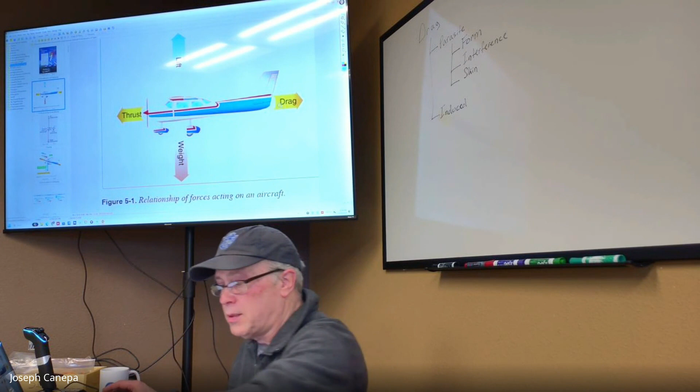All right, 4 forces of flight, what are they? Okay good, you got that. All right, let's start from the top of session 5, we'll fly through the first part of it. So obviously this is all aerodynamics we're talking about today. Again, there's our four forces: thrust and drag, lift and weight. One thing I maybe didn't mention last time is that in steady flight, these forces are balanced, so they're equal: lift equals weight, thrust equals drag. That means in any steady flight, not just flying straight and level like this, if you're in a climb, all those forces are still in balance.

So in this case, this seems kind of weird, but if you're climbing and the plane is steady, going up a flight path like this, all of those forces are equal. The only way I can think of it is you have to think a little bit about Newton.

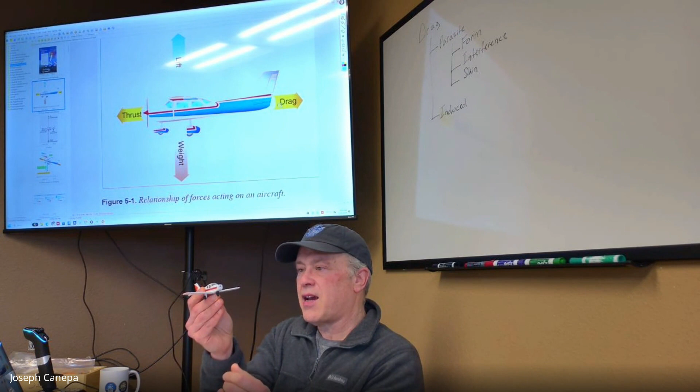He said whenever you act upon a mass, there's always going to be an equal and opposite reaction. So if this plane has zero weight and it's moving in this direction, with no forces changing that, it's just going to keep going that way. That gets back to this lift versus weight.

A lot of times people think the lift increases in a climb and it's always increasing. That's not the case. That's an important concept, and it's easy to misunderstand. So when you're in a constant climb or constant descent, or flying straight and level, both the lift and the weight, the thrust and drag, cancel each other out.

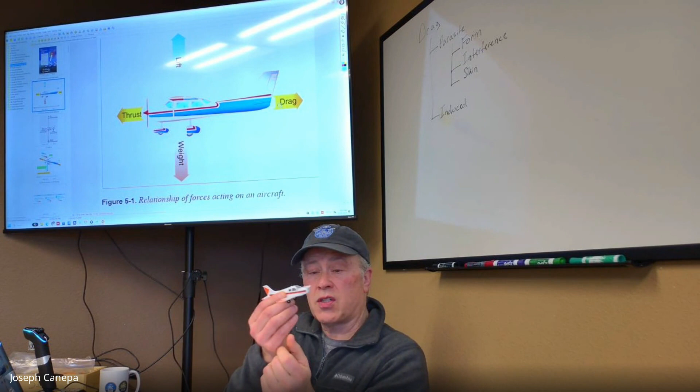So if the aircraft weighs 2,000 pounds, the lift has to be 2,000 pounds to cancel out, whether it's climbing or descending. Same with the thrust. If you've got 200 pounds of thrust moving in this direction, you have to have 200 pounds of drag in order to maintain that constant, whether climbing or descending.

If you understand that, you're going to be able to get a lot more questions correct on the FAA exam. It's one of those things that confuses a lot of students. Anyway, I thought I'd stress it a bit more. If you have questions on it, definitely talk to me, because I try to explain all this stuff as best I can, but sometimes I could probably go into a bit more detail.

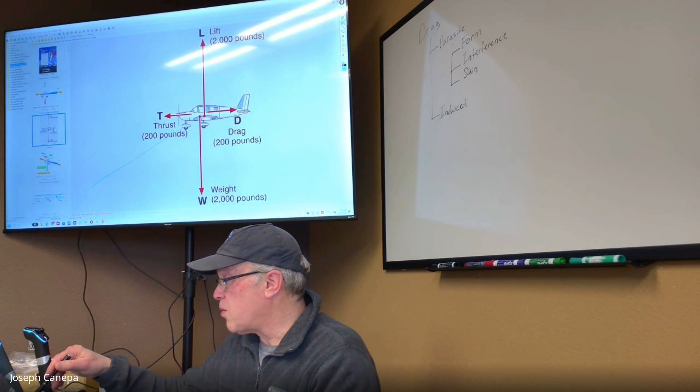So here's a good example. You've got an aircraft that could be flying in any flight path. It could be going up, or the flight path could be going down like this. Again, the lift is going to be equal to the weight, even though the aircraft is going down or up, it doesn't make a difference. That's constant flight, constant speed flight and a path there.

Yeah, and the way they worded it in the book, this is on 5-2, in steady flight the sum of these opposing forces is always zero. There can be no unbalanced forces in steady straight flight, based on Newton's third law, which again is that for every action there's an equal and opposite reaction.

And let's go to this one here. What's opposite of flight path? Relative wind is always opposite of the flight path. Important concept, you want to understand that.

So if flight path, well you guys tell me, what's the flight path of this plane right here? Down, it's going down. So the flight path is there. Where's the relative wind? It's up like this. It makes sense when you think about it. Relative wind, they're talking about the wind hitting the plane itself. So when it's flying through the air like this, the wind that's hitting it is from here.

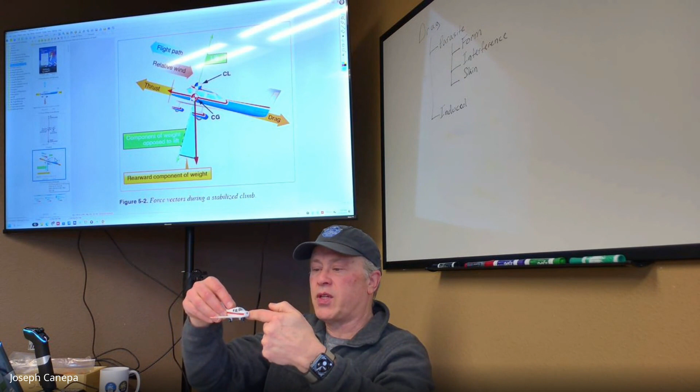It'd be the same if I was just running at, whatever, 10 miles an hour. If I'm running along, I feel a slight breeze against my face, right? That's relative wind because I'm producing forward motion. And the opposite effect is that air is hitting my face, so I have that relative wind in my face.

Same with the plane, but it's always opposite of the flight path. So flight path is this way, relative wind is that way. If the flight path is this way, again, just the opposite there. And that's important because how do we calculate the angle of attack? Does anybody know what the angle of...

Okay, so actually what you could say, that's really close. I can simplify it for you. That's correct, but instead of saying angle of the chord, just say it's the chord line versus the relative wind.

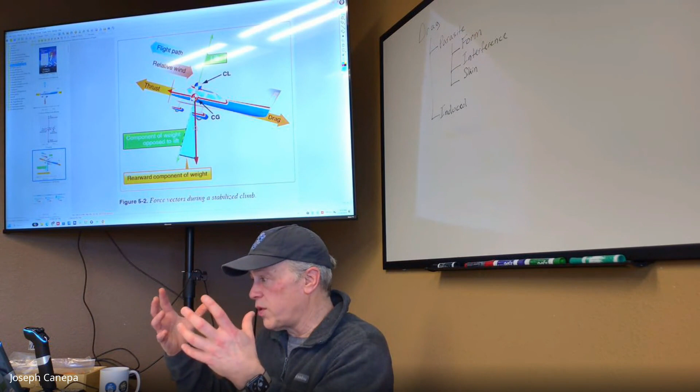So here, this right here, this lift, this is a vector - this is the total lift acting on the aircraft itself. This is the total weight. Weight is always perpendicular to the earth because that's where we get weight from gravity, right? So there's what's called a rearward component of weight. We can think of the rearward component of weight as when the plane goes into a climb, there's always that force trying to drag it down to the earth. In this case, if the plane's flying straight and level, the rearward component of weight isn't there.

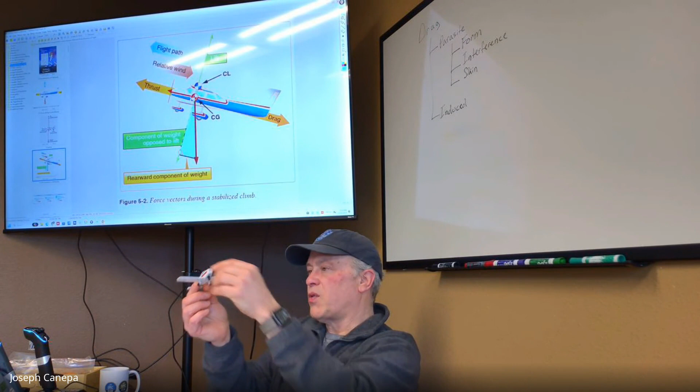If I angle it like this, going into a climb, the rearward component of weight - there's actually a little bit pointing this way. You break it up into two different components. That's what this diagram is showing you, that there are different components. You've got the total weight of the aircraft, but the load component of weight opposed to lift - that's what this is right here. And then this is the weight of the aircraft. Same with lift - they don't show it here, let's see, maybe they've got another one that shows this.

You can actually break it up into vectors up here as well. You've got your vertical component of lift, and you've got the rearward component of lift. Here - there's your vertical component of lift right there, and then you also have a rearward component of lift or drag, induced drag right there. This gets back to what we talked about a little bit last week about induced drag. Do you guys remember what that is? Induced drag is?

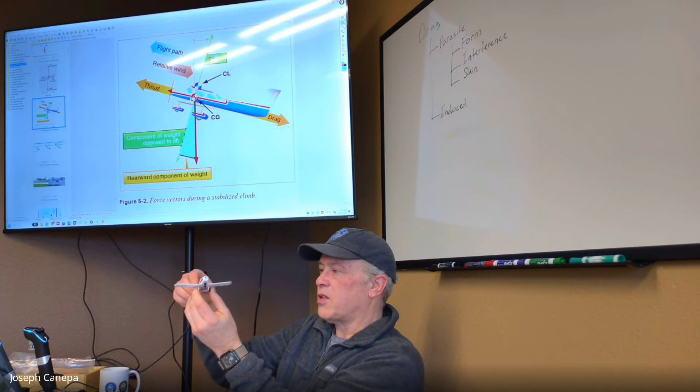Anytime an aircraft produces lift, you're going to have some drag with it. If you increase your angle of attack, you've got your lift going this way, but some of the lift is actually pointing backwards - that's your induced drag. So it makes sense the airplane is going to slow down if I fly along at a constant power setting and altitude, and start pitching my nose up to maintain altitude. There's that component of lift pointing back - that's what we call induced drag. It's induced because the pilot is controlling the aircraft; they're inducing it because they want a higher angle of attack to produce more lift. Does that kind of make sense?

So we'll get into more of this stuff here in a second too. So it's...

Okay, so you guys talked about the thrust, the lift, flight path. You've got that down. Satisfied with that. I'm going to show you this next thing.

On page 5-4, they've got a formula for lift, and it looks really complicated when you look at it. Let's just break it down. So the lift formula, let's see if I can do this here.

So lift equals coefficient of lift, times the air density, times velocity squared—that's an important point right there, we'll get into that in a second—times the shape of the wing, or the surface area of the wing, divided by 2. So that's our lift formula.

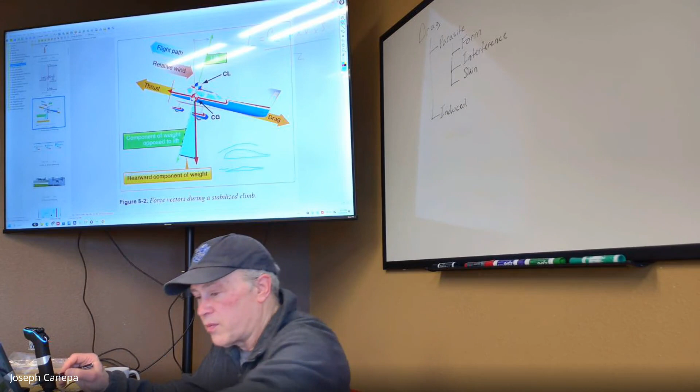So if they're both these wing cross sections—this is just a cross section of the wing itself. Again, if I were to chop this wing off right here, you'd see that cross section of the wing. That's what we're looking at. So this particular wing right here has a much higher coefficient of lift. So that's going to plug in right here. That's how that variable works.

The P right here, that is—and it's not P, it's something else. Well, no, it's a Greek character, and I don't know, I should know what that is. Your dad probably knows. But in any case, that's air density.

So what affects air density? What did we learn? Temperature. Okay, what else? Altitude. Yeah. Humidity. Yeah, okay. Temperature, humidity, right? Okay, and pressure. All those things are going to affect the density of the air. Okay, so that makes sense.

The higher the airplane goes, the less lift it's going to produce, or the colder it gets, the air is denser, right? It's going to produce more lift. I can see this every day. Every time I go up flying in the wintertime, when I take off, I use a lot less runway. I also can climb a lot faster for a number of reasons.

It's not just that the air is denser. The engine runs better because it's cooler. The air is cooler. The engine breathes just like we do with our lungs—it needs dense air to operate. So the denser the air, the more power it produces. We've all heard the term intercoolers.

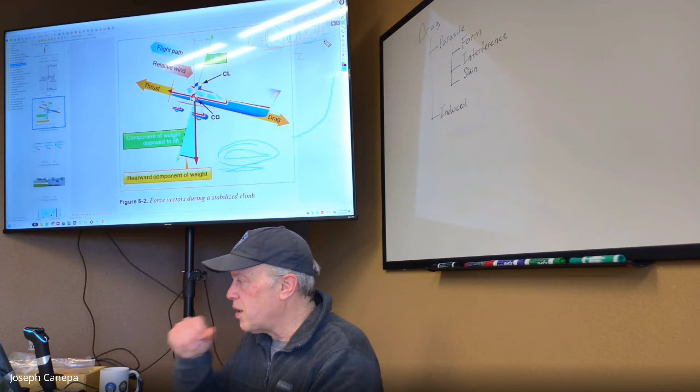The big takeaway here is that as the velocity of the aircraft increases, and we saw this when we did our flight, we can prove it right here. We saw that as we decreased our airspeed, we had to compensate with a higher angle of attack. So here we are flying along at 110 miles an hour. Now we're starting to lose airspeed, we've got to compensate for that, so we have to produce more lift. Finally we wind up with a high angle of attack because we need to keep producing that lift. That's that formula in action.

So we'll look at this again, the formula, but if that formula is describing the situation there. So one thing we don't see is the angle of attack there, just the formula itself.

All right, so we've gone through this high level speed, flight path. Again, you have that down.

Here are a couple of planes, aircraft that use lift differently. They vector thrust. So that's a Harrier jet. Has anybody ever seen one of these fly before? They're incredibly loud, aren't they? They make so much noise. But yeah, they can just hover in the air.

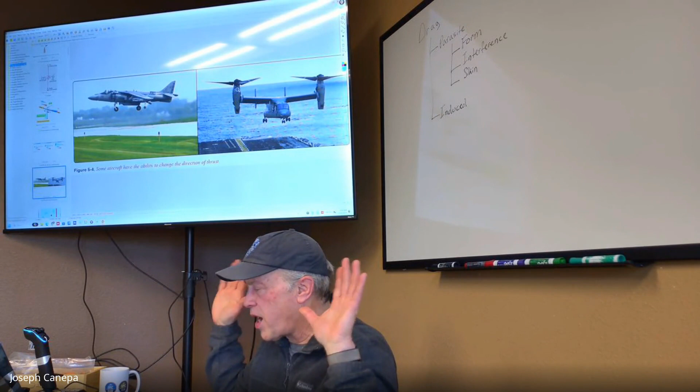And then this, I believe, is the Osprey. Yes, and those are these big engines right here - they actually rotate the propellers forward and aft, so they can adjust the plane itself. So that's thrust vectoring essentially. We don't do that obviously with general aviation aircraft.

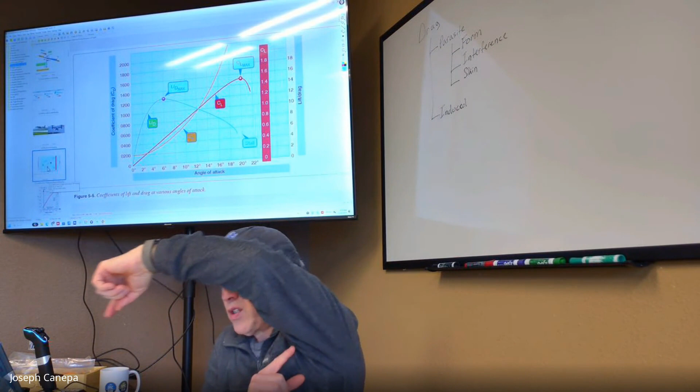So it's an incredibly efficient aircraft. You could load a lot of troops in there and get them landed in a field someplace if you needed to, and get in there fast, unlike a helicopter. Helicopters are limited by that - you've got the rotor swinging around, so they can only go so fast. Helicopters can't go much more than 250 knots, just because the rotor is going so fast when it's swinging around and traveling in this direction. The rotor swinging over here is traveling through the air much faster on this side as opposed to this one right here. It's a good concept to understand - we're going to get into that too with the props on the plane. But as it swings through there, it goes too fast, and that limits the speed of it. So the Osprey has a huge advantage over it.

All right, so let's look at some charts here. This is a coefficient of lift and drag at various angles of attack. Again, I just showed you this in the simulator itself.

So we started the plane out here at a lower angle of attack - this is the low angle of attack. And we started, the angle of attack increased to maybe like 10 or 12 degrees. Watch what happens here - the coefficient of drag, which is not the same as coefficient of lift but in a sense is proportional to it, relational to it. So you've got your coefficient of drag right here. As the angle of attack increases, your coefficient of drag increases - right there, you can see that. And it gets to a point where it just goes to infinite.

Does anybody know what that point might be? What would, as a pilot, if I reached that point in my plane, what would I expect the plane to be doing? Stalling - yeah, it would be stalling. Because the coefficient of drag is just too high, and that's because the plane is at such a high angle of attack - it's hit that critical angle of attack. It can't produce any more lift to counter that coefficient of drag, that drag. So it's going to start to settle.

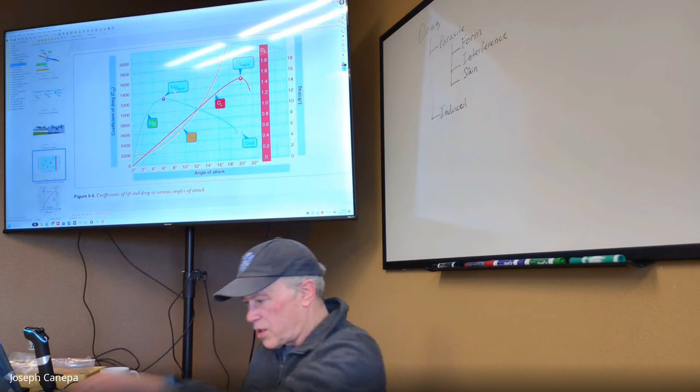There's other charts you're going to see, I'm going to throw a ton at you. This one can be a little confusing, but think of the primary elements here as lift and drag. Just what is the lift of the aircraft, what's the drag, and keep in mind that drag refers to all the different components producing drag on the aircraft. It's that induced drag that the pilot is inducing on the aircraft. As they increase their angle of attack, they're increasing their induced drag, and that's what we're seeing here.

They talk about 16 degrees. After that, the wings stall, and the plane is not able to maintain the altitude you're at. The important thing to understand about stalls is they aren't violent maneuvers in most general aviation airplanes. You'll feel kind of a buffeting, and the nose will kind of fall down like this.

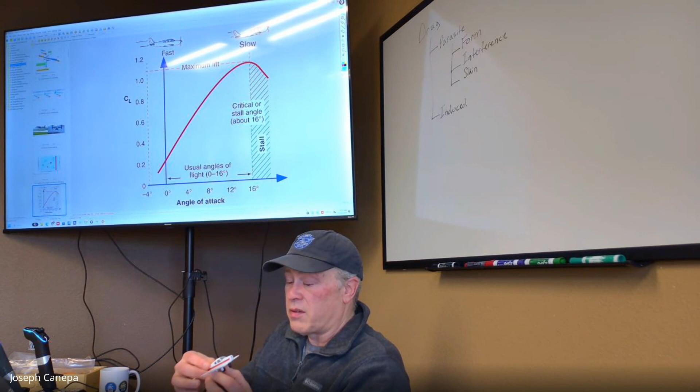You'll start losing altitude. I've done this before at 5,000 feet - my instructor forced me to do this. We took the plane up to 5,000 feet, and he basically locked the control yoke and said, you need to control the aircraft with just the rudders. Essentially what we did was we stalled the plane, it was a little Cessna 152. We stalled it, and the plane just floated down like a leaf, the whole way down. It was a really weird sensation. I'll do it with you guys if you want to try it sometime, it's a lot of fun. But I'll never forget that experience. It helped clarify, for me anyway, what's happening in a stall.

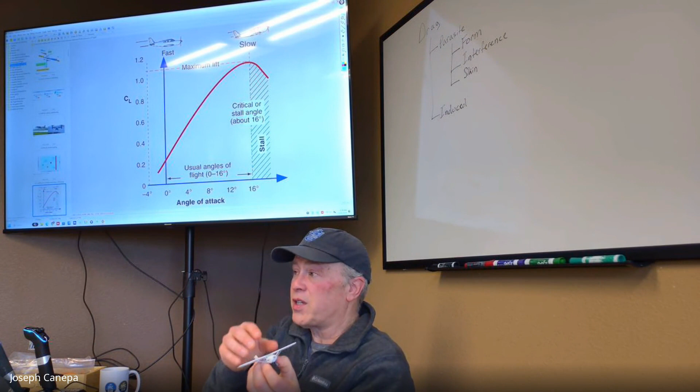Because you can still, to a certain degree, control it. When you stall an airplane, it's not like the whole wing stalls. If the whole wing stalled, the plane would just literally fall, right? If you had no airflow over the wings, the plane is just not going to support itself, so it's going to fall. That's not what happens in a stall. In most cases, it's just going to start floating down like this. In some cases, the nose is going to pitch down. Most of the time, if you just let the airplane do what it wants to do, the nose is going to want to pitch down and recover from the stall on its own.

Right, coefficient of lift, yeah. So you can only produce so much lift with any airfoil.

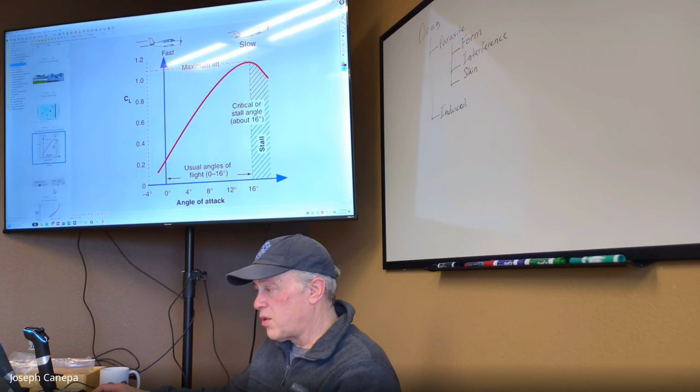Let's go here, okay, let's talk a little bit about drag. This is on page 5-6. There are, up here I've got a couple of them. There's two main types of drag: parasitic drag and induced drag.

So parasitic drag has to do with everything on the plane that's really not related to producing lift. So when you look at this plane, is there something on it that just doesn't look like it would produce lift? The gear, yeah, definitely, that's going to produce parasitic drag, you've got all that stuff hanging out. What about if we get really close to the plane, is there other things we can see?

How about antennas? Antennas produce drag. Rivet lines produce drag. It's probably going to produce a certain amount of drag, especially if you bring the throttle way back, it's going to produce a lot of induced drag at that point, right? All right, and then what else?

Yeah, lights that stick out, you'll see it a lot on older aircraft. The lights weren't built into the wings. The newer aircraft, they're all built into the wings, so they cut down on the drag. But a lot of the older aircraft had these huge things that came out. I think it was the DC-3 that had a huge spotlight that swung out from underneath the wing itself, and that produced a lot of drag.

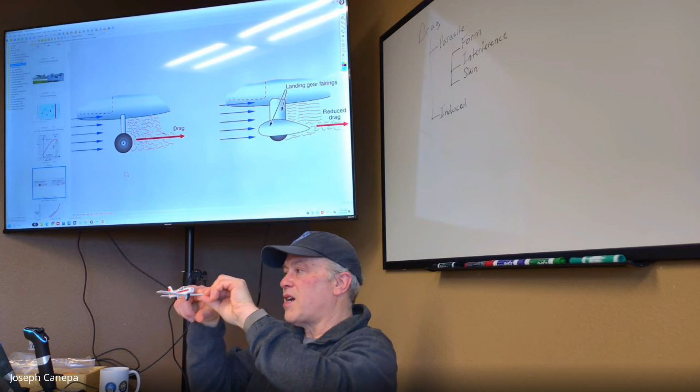The fuselage itself, believe it or not, is designed to produce lift. And it actually does. If you look at the shape of it, it kind of looks like our Bernoulli camber. It's got a kind of camber. There's the fuselage right there. See how it slopes back like that? It's actually designed to produce a little bit of lift. You get a flat body right here. The air travels faster over the top, so it's going to have a little more downwash here. It's going to produce a little more lift there. So that's part of the production of lift.

Whereas the landing gear is just pure drag. In this case, we call it parasitic drag. So rivet lines, bugs, and things like that, that's going to produce a certain amount of parasitic drag. Believe it or not, people laugh at me about saying this, but when I wax my plane, I do feel a difference in the performance of it. I get higher speed, especially after it's been through a summer, a lot of flying in the bugs and stuff like that, and it's coating everything. Cleaning it up really does help a lot.

So, all right, let's see. Let's go here. So that's parasitic drag there, and again, that's just one of many.

So the thing about parasitic drag is it's not too noticeable at slow speeds. If you're flying along like this right here at, let's say, 60 knots, and the plane's top speed is 120 knots, parasitic drag isn't that big of a factor. The rivets and stuff like that, they're not going to produce that much drag. But the faster the plane goes, the more those things are going to affect that parasitic drag. It's going to increase the drag on the aircraft, okay, the parasitic drag.

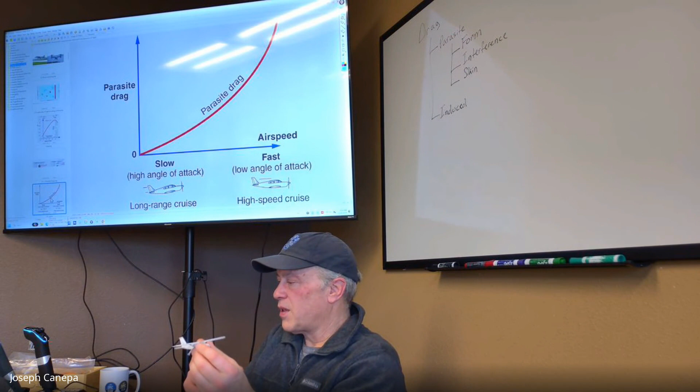And again, so parasitic drag goes up as the aircraft goes faster, and so much so that at some point the plane just can't go any faster with the induced drag and the parasitic drag. Well, actually, with parasitic drag, the plane just can't overcome the parasitic drag. The induced drag actually at higher airspeeds drops down to almost zero, almost nothing, because of the way -- let's go back here.

So here we're going fast. This is where we have a low induced drag right here. And if I go slower now, at some point here, the pilot's going to start pitching up. There we go. Okay, you can see the wing there increasing, the angle of attack increasing. Now we've got a high induced drag there. Now there's a lot more wind, the relative wind, hitting the underside of the wings there. It's hitting the bottom of the elevator here, the horizontal stabilizer, also the bottom of the aircraft.

Getting hit, and you're getting lots of induced drag, as opposed to flying much faster back here. Our induced drag is almost nothing. That's because Bernoulli is doing most of the lift there, right? Okay.

So again, Bernoulli right here is producing the lift. This aircraft weighs 2,000 pounds. Bernoulli is doing a lot of the lifting there. At this point, Newton is producing a lot of the lift. But because of that, all that air hitting and striking it and producing downwash, it's producing a higher induced drag. Right? Does that make sense?

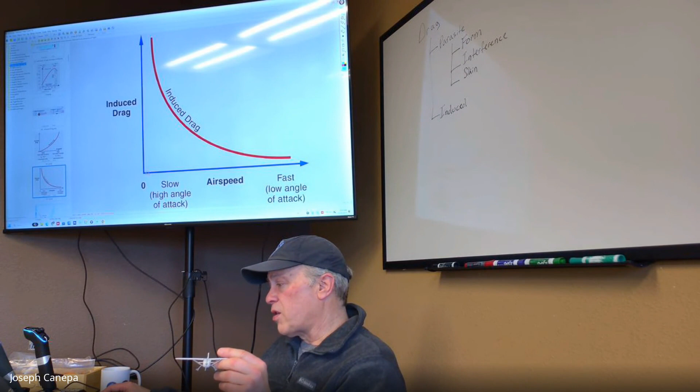All right, let's go here. There's induced drag. So this is the classic chart, a graph for induced drag. Down here we've got the airspeed on this axis right here, and induced drag on this axis. The slower the aircraft goes -- so like it's just sitting there on the ground, obviously there's no induced drag. When the aircraft starts flying, we get to about 60, 70 miles an hour, we're going to rotate. There's a high induced drag. We've got to increase that angle of attack to rotate and actually climb up away from the airport, right? So there's a high induced drag at that point.

And then as we climb up and get to our cruise altitude, that induced drag is going to start to go down lower and lower, and eventually the faster we go, the lower that induced drag is going to be. So we've got very fast, low angle of attack, just like we said in the sim. We're able to see that.

These concepts are important to understand to answer those questions. You can memorize this stuff, but I guarantee it's going to be a lot easier if you understand it. So if you have questions, please talk to me about it. I try to do my best to explain this stuff, but sometimes I don't always get it across to everybody. So if there's something you don't quite understand, let me know.

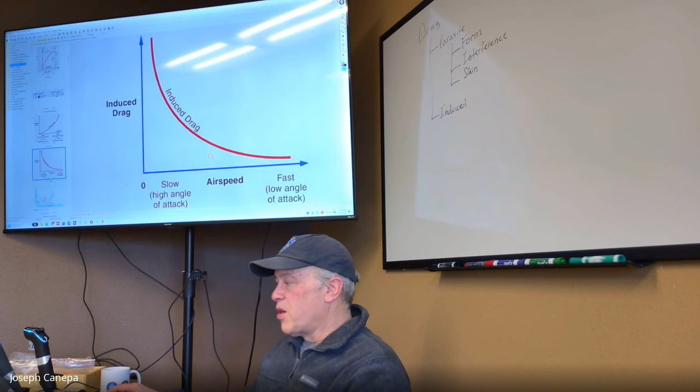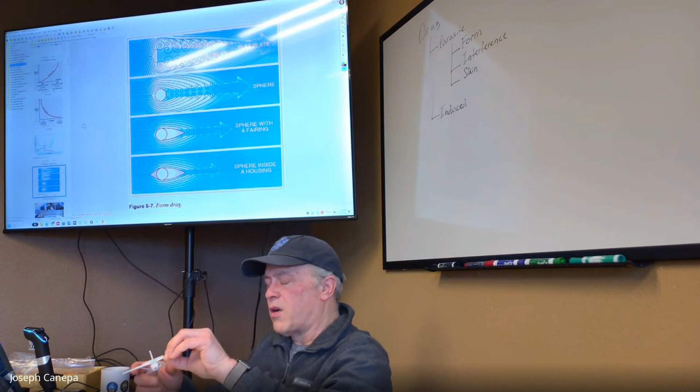A fairing is often used on tricycle gear aircraft, any aircraft that has fixed gear where the gear doesn't retract or anything like that. What they'll do is put covers over the wheels, the top part of the wheel, so that when the aircraft is flying through the air, instead of the air seeing just a round shape, it actually sees a more streamlined shape.

I think we've got one here—let's see if they've got... yeah, here, let's use this right here. So these are fairings right here, these little boots around the wheels. The wheel sticks out the bottom. What that does is cut down on the drag, the parasitic drag. It makes it easier for the aircraft to fly through the air.

They're just showing the relationship between, for instance, a flat plate. Those eddies I was talking about are produced on the wings as well when we stall. This is what's happening to the airflow—it's hitting that ball, comes around, sticks on the surface of the front of it, but then as soon as it hits the back, it starts producing these little swirls, and that's essentially creating drag.

So if this is our tire and we put it in a fairing like this, it cuts the drag down a little bit more, and this is even better because we're guiding that air around the tire so it's not producing those eddies. There's a small amount of turbulence there, but not much. It's definitely better than something like this.

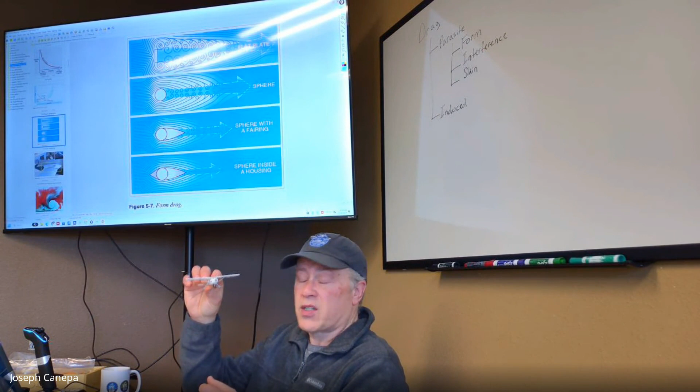That's producing lots of drag, contributing to our overall parasitic drag of the aircraft the faster we go. It makes sense when you think about it. If this fluid is moving faster, it's going to be more turbulent. If this air or liquid hits something, it goes around and maybe swirls a couple times, then smooths out again. But if you make it go faster, it keeps extending that turbulent area, and eventually that whole turbulent area creates lots of drag. So the faster we go, the more drag it's going to produce.

In this case, we're adjusting that here, putting a fairing around whatever it is. You'll see a lot of antennas with fairings on them. Oftentimes they just look like a shark fin. If you walk up to a plane and look at the outside, you'll see these little vertical pieces of plastic sticking up, or sometimes on the bottom. They're designed to cut down on parasitic drag.

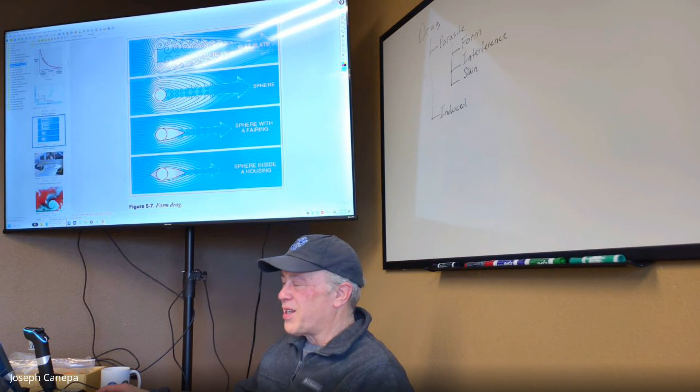Some of the older aircraft you still see flying out there didn't really care about drag that much. They were happy if they got over 100 miles an hour. So you don't see a lot of those fairings and things that reduce parasitic drag on them.

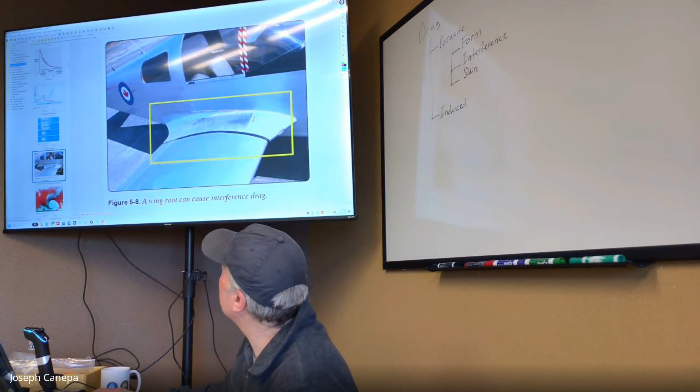You can actually see over here, there's an antenna right there that's kind of got a shape to it, coming down a little bit. This antenna back here is just a circular antenna with no drag reducing capabilities at all. This one at least has got it angled back a little bit, with kind of a shape, a fin coming off of it there. So that's helping to reduce the parasitic drag.

So again, form drag has to do with the shape of the aircraft, the airfoil, and various intersections of the wing, the connection between the landing gear and the wing or the fuselage. That's going to produce form drag. So that's what form drag is.

There's also skin friction drag, which we've talked about. That's going to be your rivet lines, and if you've got an old airplane, sometimes the paint has this flaky look to it, almost like a powder. That produces a tremendous amount of parasitic drag at high speeds. At low speeds it's not going to do that much, but at high speed it definitely slows the aircraft down.

And then there's interference drag, let's see, we talked about that.

Oh yeah, actually I got that mixed up. Interference drag is going to be the intersections between the wing and the fuselage, and various areas like the gear attaching. That is interference drag.

Form drag is essentially any shape on the aircraft that is not going to produce sufficient lift or any lift at all. So it could be just the underbelly of the aircraft, the shape of it, that's going to produce a certain amount of drag.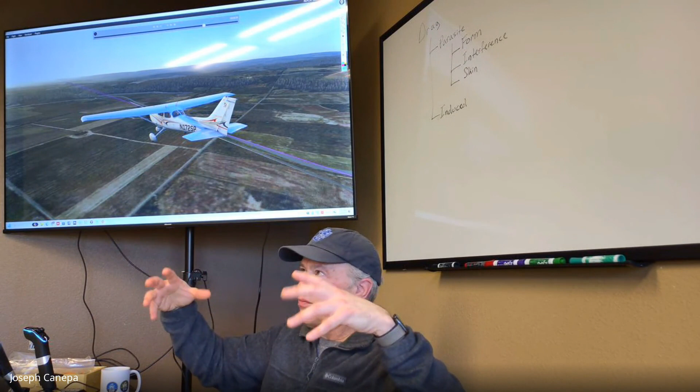High speed—has anybody ever seen the movie Die Hard? It was Bruce Willis, an old movie, came out in the 90s I think. There's a scene at the very end where Bruce Willis is running down the runway, and there's a huge jet landing right behind him. They filmed this live, with a real jet landing right beside him, a film crew out there, smoke blowing across the runway at night—really brilliant scene. As he's running, the plane passes over the top of him.

And you see this circular form—do you remember seeing the circular form of the gas there? That's a wingtip vortice, and you actually saw it in the movie. If you ever watch it again, at the very end, look for Bruce Willis running along the runway, and you'll see the swirl of smoke, and then you'll see him fall. I thought that was a really good illustration of how powerful wingtip vortices are. So this is something we talk about—what a wingtip vortice is.

Let's get back to Bernoulli and talk a bit about that. As this plane is flying along, you've got low pressure on the top of the wing and high pressure on the bottom. As air flows across, it gets to the end and wants to go to where the low pressure is. The air on the bottom tries to escape, slowly flowing outward. It hits the wingtip and immediately wants to go to the top, producing these spirals. If I draw it in another dimension, the spirals would look like this.

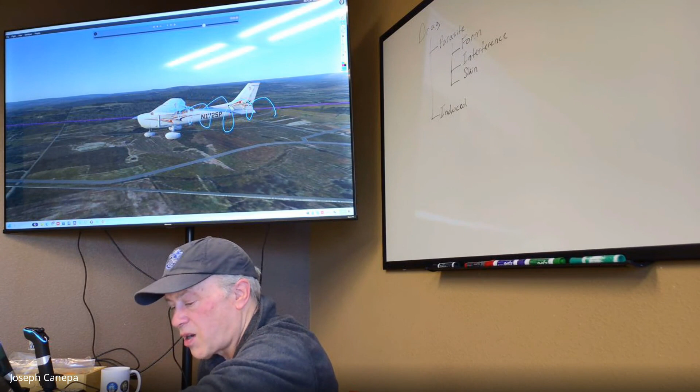So that's why it's important for you to know what a wingtip vortice is. It also plays a part in landing, which we'll talk a little more about. Wingtip vortices are strongest when the aircraft is flying its slowest and it's heavy.

They talk about the wingtip vortices here, and this is essentially what you're going to see if you were to actually see it. That's why I love that movie so much, because at the end you actually see not just the wingtip vortices from the smoke, but how powerful those vortices are to just blow him over. The actor didn't even know this was going to happen, and when it hit him, he wasn't acting. It just knocked him over as he's running down the runway, very similar to the illustration in 5-7.

You'll actually see these vortices with these swirls, and then it eventually hits him and he wipes out. It's at the very end of the movie if you want to take a look. I thought it was just a good way to illustrate that.

So let's take another look at it. If we look at the vortices again, the air goes from the high pressure air on the bottom of the wing, hits the end of the wing, springs out, and pops over the top, creating these swirls.

This is a small aircraft. If this was a 747, the vortices would be much stronger because they're displacing a lot more air, and it comes off of both wings. You have to think about it this way: high pressure to low pressure, the air tries to flow up to the low pressure. Because there's low pressure on the inside, it produces the swirls on the inside.

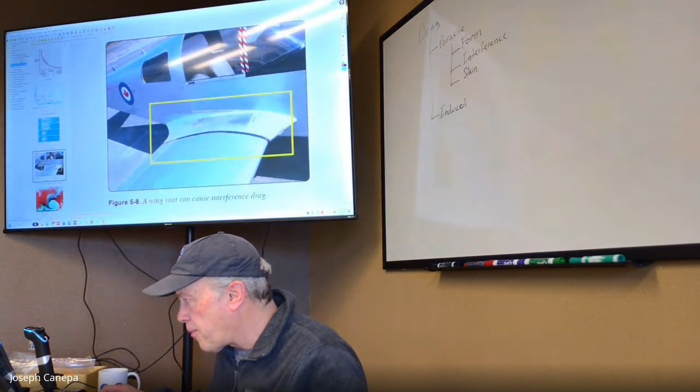So the normal path for that big jet - they sink at about 500 to 1,000 feet per minute. We want to be away from that vortex because it's still strong even after a couple miles. If you're right behind the aircraft, it could break up the plane itself, or at least roll the aircraft if you're flying close enough. Depending on it, if you're flying a really small plane, it's going to have more of an impact than it would on a larger one. But we want to stay away from those things as best we can.

Yeah, absolutely. They'll give you a wake turbulence avoidance alert, or a caution - they'll just say 'caution wake turbulence' or something like that. But it's typically around the larger airports where they're flying larger aircraft. If you had two small planes flying behind one another, since they're not displacing as much weight, the wake turbulence isn't going to be as intense, so it's not as critical there.

Still, you want to watch out for it, because what produces those vortices is that high angle of attack. A heavy aircraft is going to displace more air, right? And it's going to produce higher, more intense vortices - a greater wake, just like a large boat. If I was in a canoe behind a cruise ship, it would be a rough ride behind it. Same thing with a plane - you're traveling through that fluid, and you want to avoid areas that could cause problems.

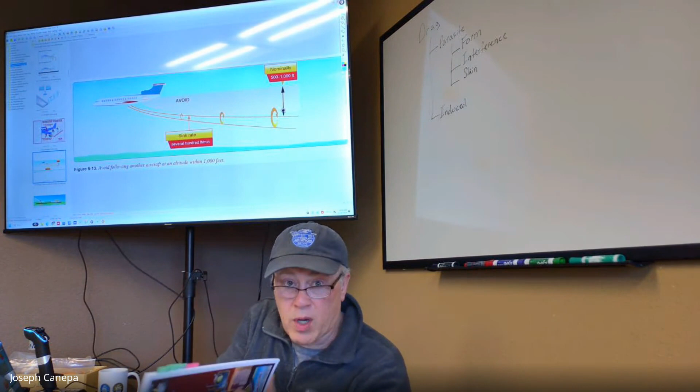Take a hovering helicopter - you don't think about that, but you've got all this downwash, kind of a conical circle around that aircraft producing these vortices all the way around it. That can cause problems, especially on landing. We have a lot of Blackhawks that fly up from Madison and land at Baraboo, and you want to be careful when you land behind one of those. If they're practicing and coming in to land, you always want to be sure you don't run into their rotor wash - it's very, very bad.

One benefit for pilots regarding wingtip vortices is that as a large jet or aircraft comes in to land, the minute they touch down on the ground, those wingtip vortices pretty much stop. So if you're going to land behind a large jet, you want to land after the point where they touch down. If they touch down at, say, the first quarter of the runway, you want to land after that point, because then you won't have the wingtip vortices - they're just not producing anything anymore.

What's producing lift at that point? What produces lift when an aircraft is on the ground? The ground, exactly. So it's not producing any lift, and that's what's causing the wingtip vortices - the lift of the wings. Because the aircraft is on the ground, there's no lift being produced by the wings, and that's what's producing the wingtip vortices.

Okay, right, so let's talk about - let's take a look here. We've got to talk about stability, most of that's done here, this one. And they go into wing shapes here, we'll touch on that a little bit, but forces and terms, we do have to talk about that. So okay, let's talk about ground effect - that's on page 5-11.

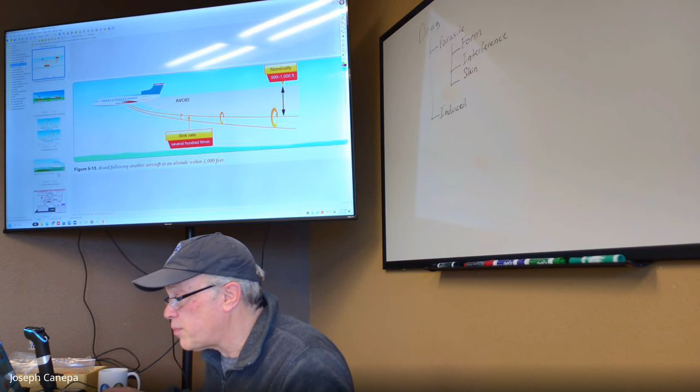What's causing it is the ground is resisting the air that's the downwash from the aircraft as it gets closer to the ground. Let's see if I can draw this here. There we go, this is a good illustration of it.

Up in the air, the plane is flying along, maybe well over a wing's span above the ground. You can see the flow of air around the aircraft flows down nice and smooth like this - that's the downwash. There's a lot of Newton's work in here, where it's deflecting that air down, pushing it down. Think of this part almost like a spring.

When the aircraft gets close to the ground, we get into what's called ground effect, considered usually about the span of the wing itself, close to the ground. So if my hand was the runway, and this plane right here has the wings there, if it's within that distance, this plane would be feeling ground effect - it would be producing a little bit more lift.

What's happening is you've got this downwash, and there's actually less drag occurring here. You don't have as much drag because as the air hits the ground, think of it like a spring. When this spring touches the ground back here, it kind of keeps the aircraft up in the air, so it's going to float.

This gets pilots all the time, including myself. You come in a little fast, and what happens is you stay in that ground effect, and the plane just wants to stay up there about 3, 4, or 5 feet above the ground, and it'll stay there forever until you lose the airspeed - you bleed it off slowly.

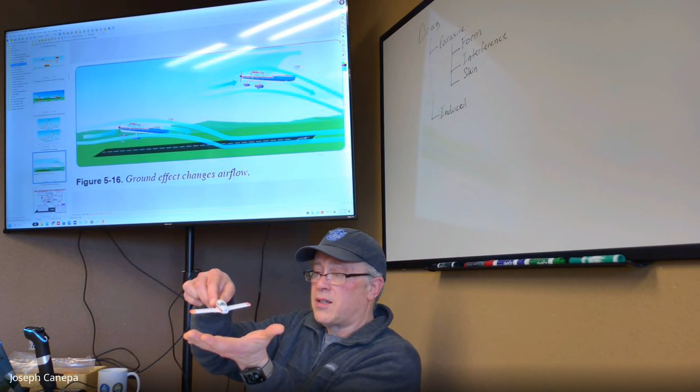What you want to do when coming in for landing: come in like this, say here's a runway, bleed off your speed and basically get to a point where you're really close to stall, if not stalling the plane right onto the runway. Because then the wings are not supporting the aircraft, the wheels are, and the plane stays on the runway.

I've had it happen to me once before, I got into a porpoising situation. I was able to work out of it. It was pretty scary. I've seen a lot of people go through it, and some of them the porpoising moment gets so intense that it actually hits the nose and destroys the prop.

So if you get into one of those, the best thing to do is just go around, give it full power, take off. Don't even mess around with it - that's what I tell all my students now. That happened years ago when I was a student, I got into that situation, but I learned a lot from it. Again, if you get into one porpoising moment, the best thing to do is go around, come back, and stabilize your approach, making sure you're coming in at the right speed.

Ground effect is something we have to be aware of because it affects how the plane flies close to the ground. It's not going to just come in and we're not going to be able to just land like this.

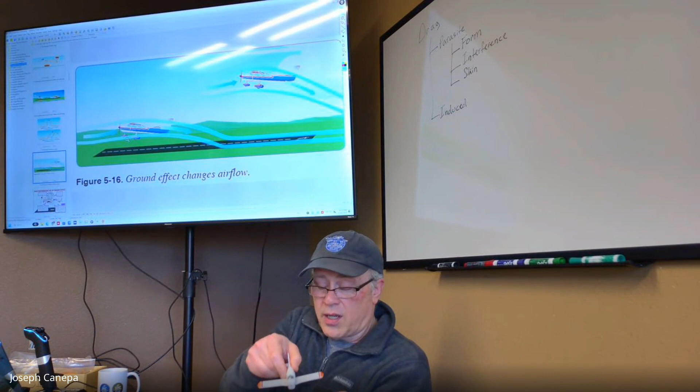Usually you hit that ground effect. What you want to do is fly in and then hold that nose off the ground. You may have to keep applying back pressure to keep the nose wheel off, so you land on your mains, then let it slowly settle out on the ground.

That ground effect happens because the downwash of the plane is hitting the pavement. It's reducing the drag on the aircraft, so it essentially produces more lift.

If we have a 2,000-pound plane, we really want the lift to be much less than 2,000 pounds, right? We want the plane to come down, so we have to reduce the lift of the aircraft. So we have 2,000 pounds of lift, maybe we want like 1,800 pounds. We don't know what that number is exactly. In the cockpit, all we're doing is adjusting the throttle and the control yoke.

You want to make sure that when you come in, you're aware of that ground effect, and you'll experience it the first time you fly. You'll see it several times after that too. That's just the way aircraft operate with ground effect.

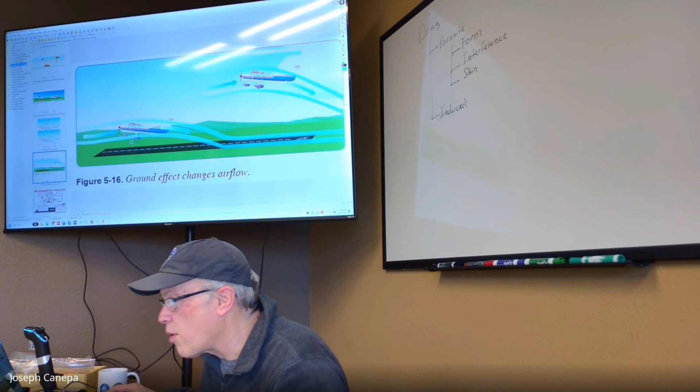The other thing to consider is you've got this downwash, and you also have those wingtip vortices, remember we were just talking about those. Let me see if I can do a diagram like this. Remember we were talking about the wingtip vortices where they came and swirled back like that.

We've got a high angle of attack right here. This is our chord line of the aircraft, and here's our flight path. I've got a relatively high angle of attack, and it's producing those vortices. The thing about wingtip vortices is they start to dampen the closer you get to the ground. As they come back here, you can see they're not as intense as they are up in the air at the same angle of attack. This one is flying the same flight path, same angle of attack, but it's producing much larger vortices up here as opposed to down here.

Wingtip vortices are drag, right? So because of the reduced strength of those vortices as you get close to the ground, you're going to have less drag back there as well. It's kind of a combination of things causing this ground effect. The thing you have to be aware of is that the plane is going to operate a little differently in ground effect than it would in regular flight.

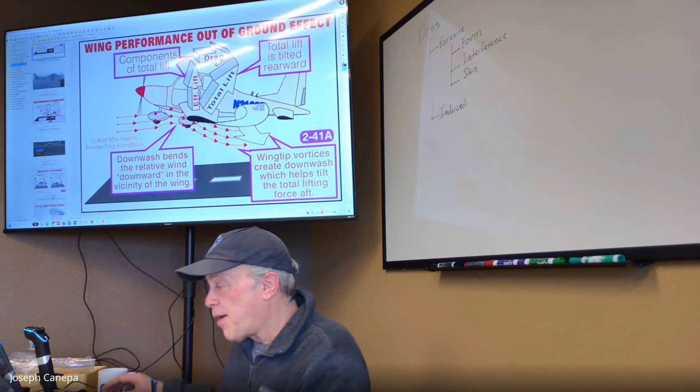Let me just introduce one last concept, and then I'm going to turn it over to Wes here. Let's go to our plane and talk about some of the forces in the turn. Let's do this. Actually, let's just do this. All right, so first thing I'm going to do is switch over to our...

Switch this right here. All right, so what I'm going to do is watch the outside of the plane. See if I can adjust our height. It's roughly what our head would be looking at right there.

All right, so I have to first off, yeah. You guys hear that? What was that? Stall warning. Yeah, okay, last demonstration here.

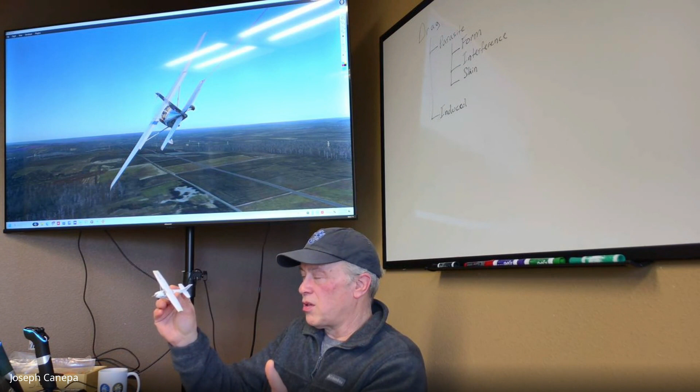What's happening there is you're feeling centrifugal forces, or G forces, in the turns. So what I always have my students do to illustrate it is we go into a steep turn. I'll do the turn, all you have to do is raise your arms. And if your arms weigh 8, 9, 10 pounds, in a steep turn they're going to feel like twice that weight. You can feel it, when you lift up your arm it feels really heavy.

And you start getting you sink in the seat, you feel heavier, because essentially that's that load factor and the G force that's forcing into your seat. What's happening there is we've got all these forces here.

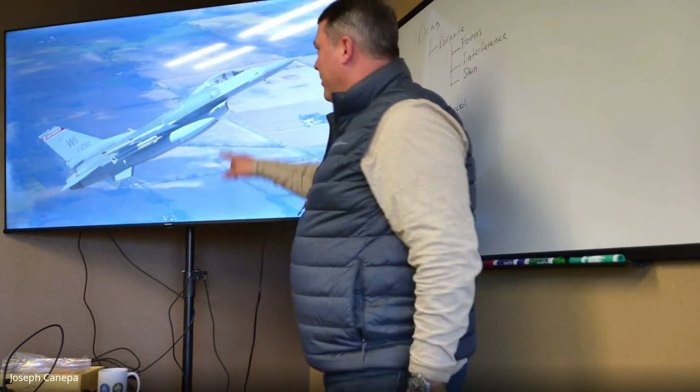Because it's trying to give as much as it can, and even then, we probably still have 100 knots overtake on the 172, trying to fly as slow as we can with this thing. So probably going by at about 250 knots. Okay, that's about as slow as this thing will fly through the air at that speed with that configuration.

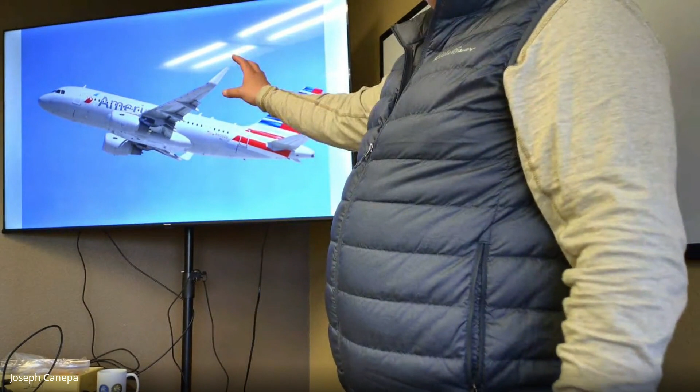All right, that's what I fly now. Airbus 319 to 321. It's a little bit different. I just thought of it at the end. I was going to grab some pictures of the cockpits that were a little different, just to show you, a lot more room for activities in here. Okay, get up, move about, grab a sandwich, go to the bathroom. So, for all that. Okay, passenger aviation.

So it's fine no matter what you want to do in aviation. Okay, there's really three groups I've kind of put things into. Your enthusiast, okay, your people that want to do things for hire, so your commercial aviation, and then people that want to serve their country and be in the military. Okay, so enthusiasts, right? Like, who are those people?

People who like go to air shows, that just enjoy flying. So person who owns a 172, people who have aircraft down in the hangar here, right? Who just, yeah, like a local flight instructor doing those kind of things, just to enjoy aviation in general. And there's absolutely nothing wrong with that, right? Just fun, you just enjoy it and hang out and do that. And it's still, you got to be competent, right? So you got to be a competent pilot to do that.

Okay, then we have commercial aviation, right? So how do we do that? How do we get into commercial aviation? Kind of all starts here, but we have aviation colleges, and some of you guys are probably seniors, juniors in high school, right? Okay, so maybe you're looking to go to a place like University of North Dakota, Dubuque, Embry-Riddle, those kind of places where you just focus mainly on aviation or any kind of subjects. Instead of majoring in something like business, you'd major in like airfield management or something of that sort.

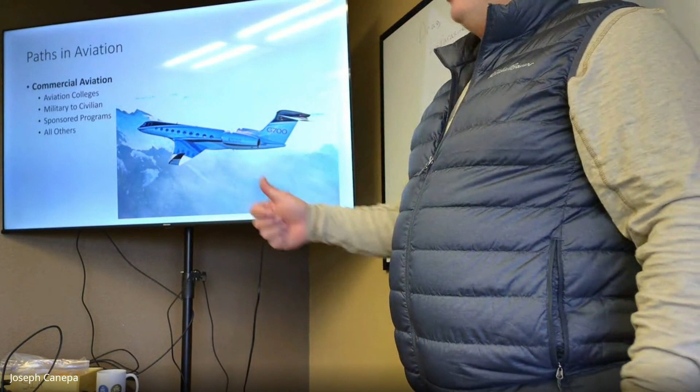And then there's sponsored programs. We have American, we have a cadet program. United has something called the Aviate Academy. So what do? Okay, this is for people who maybe don't have the money and the funding, but have a really strong interest that can apply. And then, for instance, United's going to pay for a lot of that stuff in your school. And then at the end, you're going to owe them a little bit of a debt. It's a debt you want to pay anyway, right? Because you want to go fly for them.

So, for instance, I have a friend from the Dells, a kid, who I've been talking to all through his high school career. And then when he went to college, he went to University of Dubuque. I think there's an aviation school down there, right? I forget the exact name of it. All right, bottom line though is halfway through, Envoy, who's one of American Airlines' regional airlines, they fly the Embraer 175.

They paid for half of his college education as long as he gave them, I think, 3 years at least. Okay, he had to earn that, right? He had to get certain grades. He had to do certain things. He had to be good at what he did.

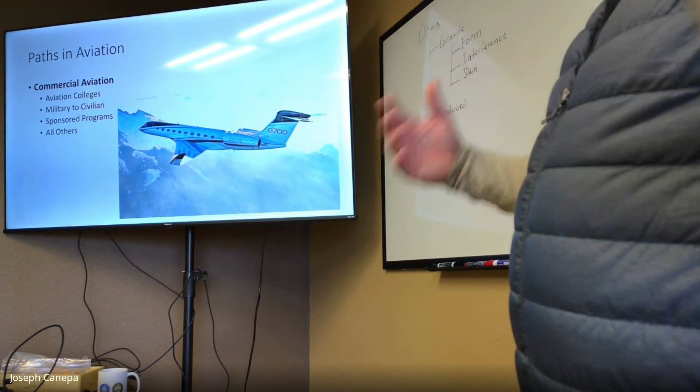So there's those programs out there, and we'll talk a little bit more that'll kind of parlay into what the funding and the cost of all this stuff is, because I know it's daunting. Okay, this is not cheap. Okay, so there's that kind of stuff, and all others. Just what you guys are doing here today, right?

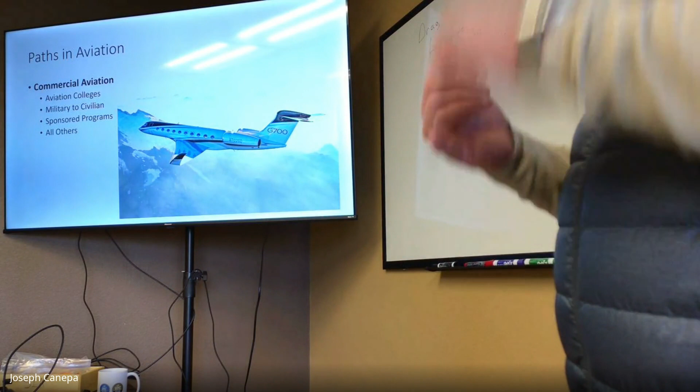You can be the person who got their private license early, then maybe in their 20s got their commercial, maybe got their instrument, and then thought, you know what, I really like flying and want a career change. They gathered everything roundabout through different ways, maybe flying crop dusters or tow planes, whatever it may be, and built their time doing that stuff. Then they apply and they get there. So it's really all avenues.

All right, in the military. Some of you may or may not want to do this. Anybody here think they may want to go in the military? Okay, a couple. So the military has every type of aircraft that commercial aviation has and more, like fighter aircraft. There's not much reason for commercial aviation to have those.

Entering methods into the military: we can go to college, because to fly in the military, with the exception of being a warrant officer in the Army, you won't get in the cockpit behind the controls unless you have a college degree. So you can go to officer candidate school, meaning you went to college yourself and now you're applying to go in with a college degree. You apply through programs to go directly into a guard unit, a reserve unit, or active duty, and then you get picked and go to officer training, flight school, and that kind of thing.

Or you can go ROTC, Reserve Officer Training Corps. That means you go to college, like Madison or Duluth, they have these programs. While you're going to college, you're also an Air Force cadet, learning to be an Air Force officer while going to college. Then at some point, near the end, they'll have so many flight spots and you'll compete for those, and that ebbs and flows with the needs of the Air Force.

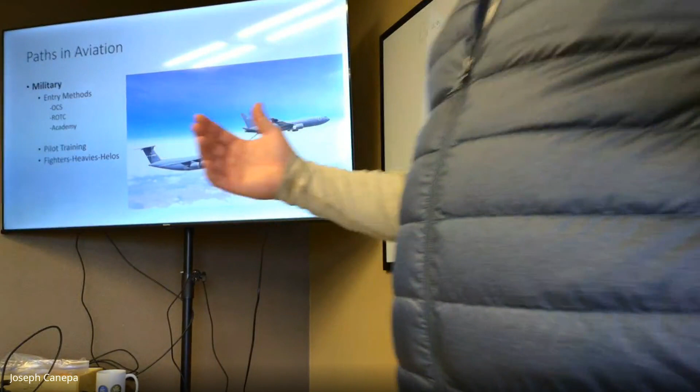Like five or six years ago, everybody who wanted to be a pilot got a flight slot. Some people who didn't want to be pilots were being encouraged to go. Same thing with Navy, Army, that kind of thing, they do it all the same in that regard. And I should say the Marine Corps and the Navy also have OCS programs. I don't know about the Army.

Or you could go to one of the academies. That's a process that, depending on where you are in school, needs to start midway or early in your high school career, so there's a lot of hoops to jump through. Because they're paying room and board for one of the best educations in the country, fast, and they're paying for it all and sending you through. At the end of that, you do the same thing based on physical aptitude and where you are in school or in your class. At the end of the academy, you're going to get a flight spot.

Go ahead, I know that's one of the questions you're asking. Sure, I'm kind of in that process right now, but did you get a nomination from one of our politicians? I did, yeah, and I can talk to you about that offline, maybe afterward. But bottom line, that politician was a long time ago, no longer in office. Gotcha, so it would be the equivalent of Congressman Kind's district.

And then for pilot training, the Navy, the Marine Corps, the Army kind of do it all the same, so I'll just talk about the Air Force. What's pilot training like in the military? You're going to go off to pilot training depending on various factors.

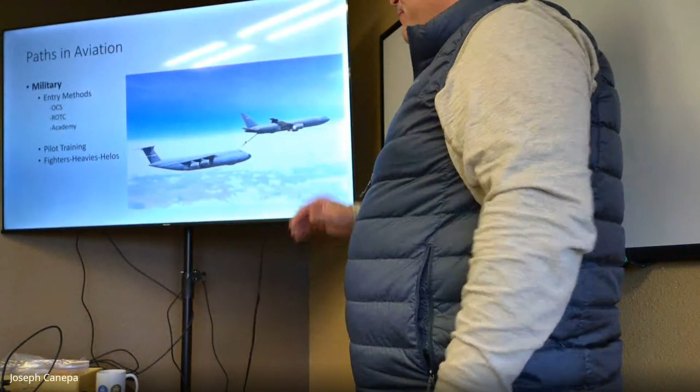First phase of pilot training, you guys know what the T-6 Texan 2 is? It's a two-seat, front-back turboprop trainer the Air Force and Navy use. You go off there and do the initial training, like how to fly the thing, similar to what you guys are doing now. Then there's instrument training, formation training, those kinds of things. Depending on how you do in that and what you want, halfway through pilot training there's something called track select.

There's going to be fighters and bombers as one track. Heavies is the other track. And then helos is the other. And the C-130 is kind of like its own side thing, but that's also kind of heavies, but you have to go to Navy training to do that, to fly the C-130 down at Corpus.

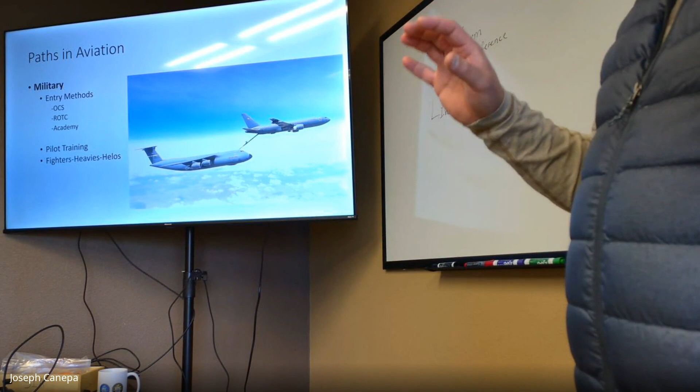Bottom line is, though, they have a certain amount of slots, right? And how you did in your aptitude, you track select. And then the class kind of splits up again. So for me, I went to the fighter track and flew the T-38.

And then when you're done with that, they have something called assignment night. I went to pilot training for a guard unit out of New York, flew the F-16. So as long as I did well enough to fly fighters, I knew I was going to go back to New York, fly the F-16. So it was kind of anticlimactic for me, but some guys in the active duty component that were there when I was in pilot training, they might want to fly the A-10, second choice the F-15, third choice F-16, or now it'd be the F-35, F-22, those kind of things, right?

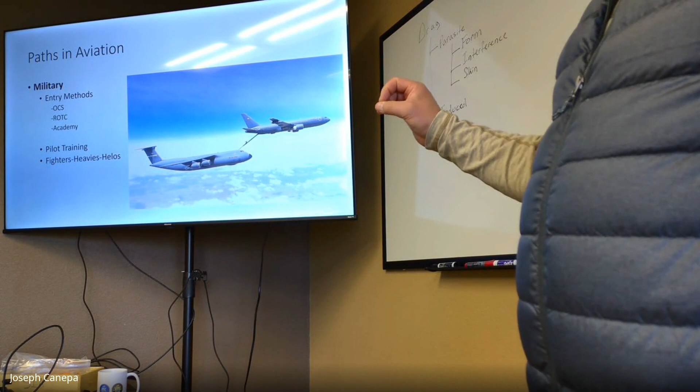And then that's when they find out in front of everybody, on a big screen in front of them, what they're going to go try to fly. Okay, doesn't mean that's what you're going to fly for your whole career.

But usually they spend a lot of money training you on something. Air Force spends initially, when you get done with your initial training, like for me in the F-16, when you get done with that initial training, 2 years into being in the Air Force, they roughly got $6 to $8 million in you. Okay? It's a lot of money, right?

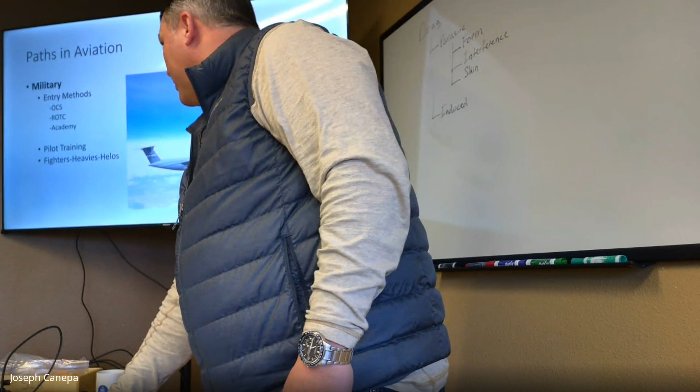When I left the Air Force with that kind of time, I was worth roughly $65 million to the Air Force. And you can't just take somebody who's a lieutenant colonel with all that experience and put a new guy in the cockpit instead, because it's not only the money that you're losing, but also the experience. You just can't replace all that, because every hour of flight time you're learning stuff, understanding things, the feel on your body, that kind of thing.

So, I don't know much about the helo track, except that no matter whether you're in the Navy or the Air Force, if you decide you want to go fly helos, they're going to ship you off to the Army during that portion at Fort Rucker. They're going to have Navy and Air Force instructors at Fort Rucker, but you're going to largely fly in an Army program to learn how to fly helicopters, which is cool too. Air Force Special Ops flies helicopters.

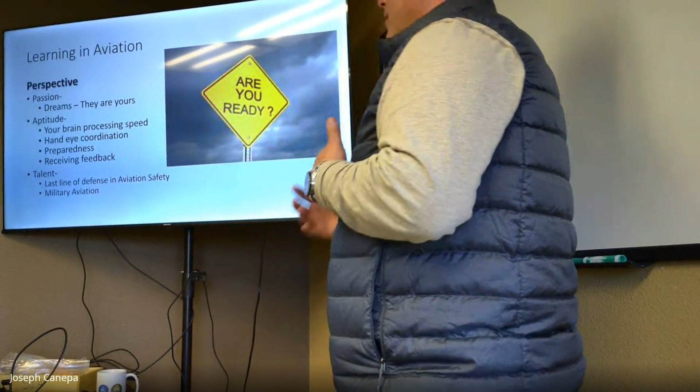What I really want to talk to you guys today about is perspective and learning in aviation, because this is probably one of the most important things I see with different kids, or young adults, who come and want to have jobs, or want to learn to fly. And some of the problems I see with younger people in this, or people that maybe haven't figured it out, depending on what their upbringing was.

So I want to tell you something I've kind of coined as passion, aptitude, and talent, and we'll break those down. Passion, it's your dream. You're here probably not just because mom and dad said you should go do this, right? It's a lot to learn. You're probably learning, it's probably harder learning this than most of the stuff you're doing in school right now, right? It's a lot to take in. So what drives that? It's because you really want it, right? It's your dream. I just need you to know that, whatever it is, don't let anybody discourage you from what it is. Know that it's yours, okay?

I'm here to tell you that anybody can do it, all right? I don't care shape, size, color, doesn't matter. How much money you have, doesn't matter.

I'll tell you about one of the most talented fighter pilots I've ever flown with, probably one of the nicest, dorkiest guys I've ever met. He's probably the most talented fighter pilot in the Air Force. He's the squadron commander now down in Madison, flying the F-35. He just came from Nellis, the Air Force equivalent of Top Gun, but a lot better. Navy Top Gun is 6 weeks, Air Force Fighter Weapons School was 6 months. He was the director of operations in that F-35 squadron, and he wrote basically the entire tactics manual. He's got a huge brain, nicest guy in the world, and you'd never know that he's that guy. Just look at that.

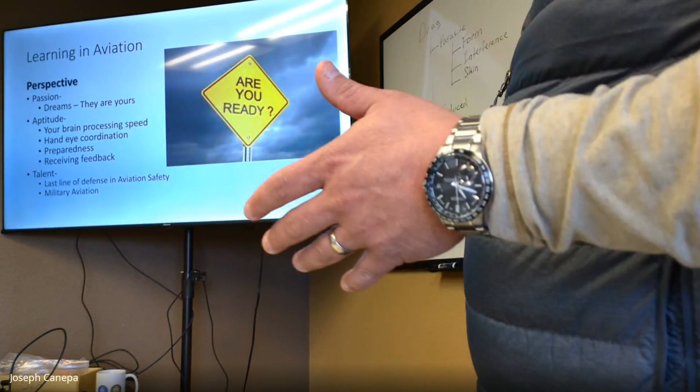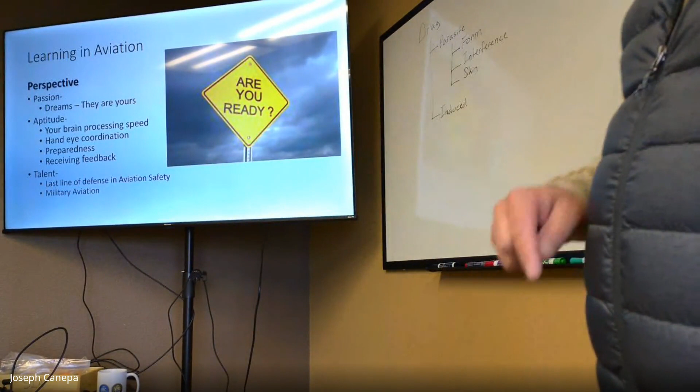Okay, chair flying. The first time you go out and taxi on the taxiway, do you want to just have the instructor telling you what to do? Or have you sat in a chair with the front of the Cessna 172 in front of you and gone through the pacing, practiced your radio calls? Hey, at this point I'm going to flip these switches, these are the checklists I'm going to run. You've done that to mentally prepare yourself. I'll tell you, it may seem dorky, but everybody does it, including the top Air Force fighter pilots. I sat for hours in front of what they call a paper trainer, doing my radio calls, practicing, running checklists, that kind of thing. Chair flying is a real thing.

So being prepared, and then receiving feedback. Be the person who's open, letting somebody tell you something, no matter what your level is or what you think the other person has. Even if I've achieved great things, I still listen to anybody else, no matter their skill level, because it might be a fair point. Everybody makes mistakes, and no matter what level they're at, it's owning those mistakes, processing it, learning from it, moving on.

So if you're one of these people that, when somebody tells you something, you come up with an excuse every time - there may be an excuse, okay, but you need to listen and process whatever that feedback is, and then learn from it and move on.

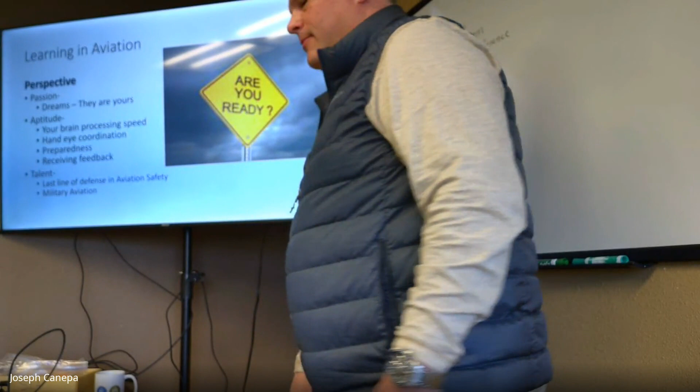All right, talent. Everybody thinks that when you watch Top Gun, you watch Maverick, and they're super talented. That may come into factor a lot of times, but in commercial aviation and enthusiast aviation, it's not really something that has to be there. You don't have to be naturally talented, a fly-by-the-seat-of-your-pants kind of guy. That's not really a thing, right?

In fact, at American Airlines, we talk in the safety industry that if you have to use talent, everything else has broken down. Things like standard operating procedures, rules like the FAAs, the FARs, AIM, radio calls, air traffic control - all those things are lines of defense. If it comes to the point where you have to use your talents to stop a bad situation from happening, a lot of things have already gone wrong.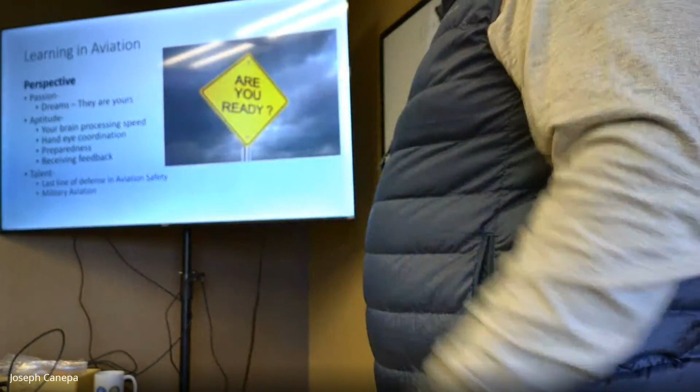It's a little different in military aviation in certain regards, because in the fighter world we have to do things like fly formation while running sensors and all those things. Some people just don't have, going back to aptitude rather than talent, the ability to process things that fast - maybe call it super-tasking. A very small percentage of the population can do that, and that's fine.

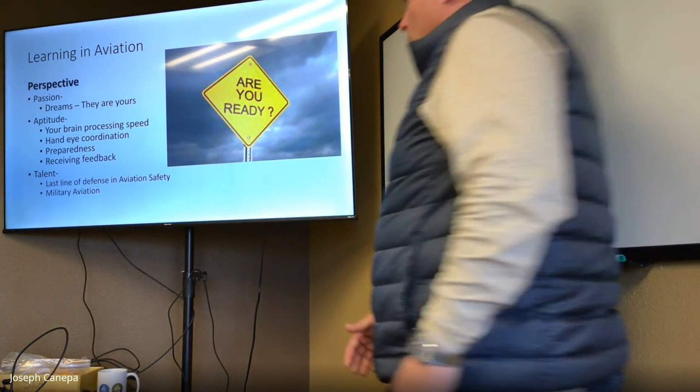I'll tell you that even people who may be on the edge with that, as long as they are prepared and have great attitudes, can do it. I know plenty of mediocre fighter pilots, even the lowest guy in the squadron, who has a great attitude and is prepared, getting through.

What do you call a fighter pilot who's the bottom of the squadron? Just like, what do you call a doctor who graduated last in his class?

Okay, we talked a little bit about maturity, that's kind of like receiving the feedback. The first time they trust you to go solo in your private pilot, you're going to have the airplane yourself doing pattern only, and you're going to go on your solo cross country. Okay, it's what are we doing when nobody's watching, right? Are we breaking the rules because we want to dive down over mom's house with the 172 and impress everybody? I'll tell you, nobody's impressed. Okay, so...

Operating inside the rules and regulations. Okay, then we talked a little bit about it already, owning your mistakes. Okay, everybody makes mistakes, so yeah.

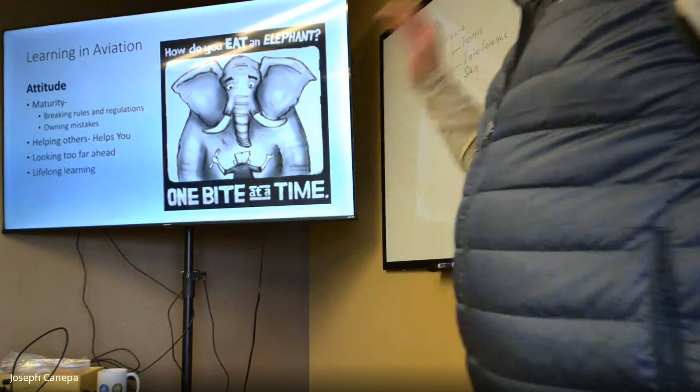I forgot to put the last notch of flaps in or something, you know what I mean? And the instructor gives you some feedback on it, or maybe I land long and fast and I kind of scared myself with the stopping distance, that kind of thing. Doesn't matter, hey, don't make an excuse. Own it, learn from it, move on. Okay, I will tell you, you'll get a lot farther by doing that and understanding that you always make mistakes and that you're going to constantly learn. And you won't go far by always trying to pawn it off and say something else was the cause of it. There's no room for that in aviation.

Okay, there's one thing you learned today, I want you to take that away from this. Okay.

All right, and then attitude means this is not a competition. Okay, even when you are in competitive programs like military pilot training, if that's the way you go, you need to know that you're not really in competition. You're in competition with yourself.

Okay, and something I didn't realize when I first got there was that really helping others helps you. What I mean by that is, hey, when your buddy's struggling with a concept, instead of thinking, all right, he doesn't get it, oh I'm going to get farther ahead because they're going to see that he's not going to get it, then I'm going to get the slot or something and he's not. Okay, that's right out, nobody wants that.

Okay, two reasons. Okay, it shows that you're a good person, and that's like half of being a pilot, right? Is sympathy and helping others. But also when you teach a concept to somebody else, it reinforces it in your mind that much better. Okay, you learn it much better. Okay, so that is one of those things that I think if young people could understand early on, all right, you're going to get a lot farther ahead that way by helping your buddy.

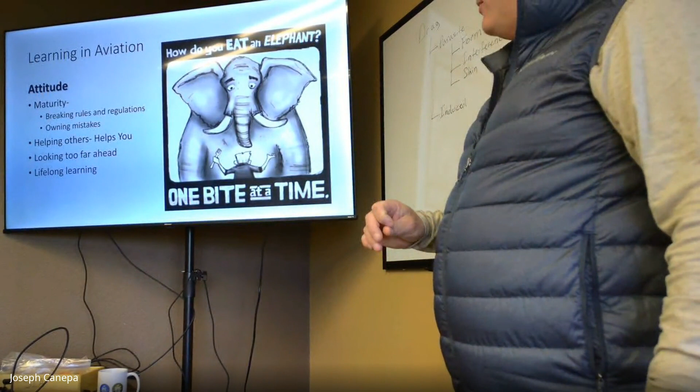So know that it's a lifelong journey. It's not like you go off, learn to drive a car, get your driver's license, and you're good. In aviation, you've got to constantly be refining and learning. It is a skill that is very perishable.

We kind of talked about the cadet programs already. How do I fund this, right? Military - you go to the military, they're going to get you all the way through every imaginable rating, with the exception of your airline transport pilot certification. And you'll have all those ratings, but you'll have all the experience and hours needed when you go to do it, to make it through the program. You won't need this, what they call build time.

Students in aviation, somebody was nice enough to sponsor this and give you guys this ground school for nothing - how awesome is that? That's a huge burden off somebody's pocketbook, your parents or yours, depending who's paying for it. And then scholarships - maybe high school has scholarships, depending on where you're going. Scholarships at college, or even going back to some of the cadet programs we talked about, those can cover some of your time.

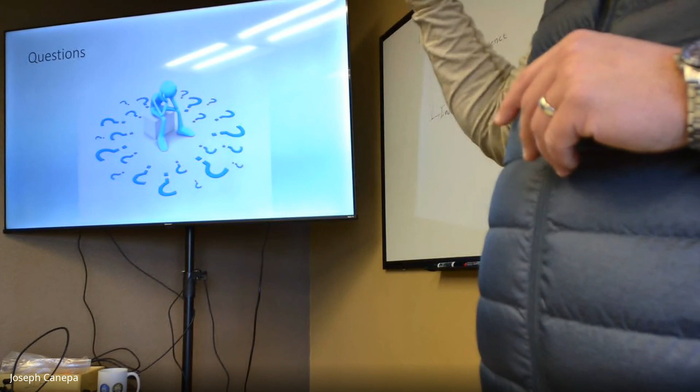Like OCS - so what kind of college degrees are you talking? Doesn't matter, could be music. One of my best friends is a squadron commander down in Tucson. He's got a music degree, and he literally has a business on the side called School of Rock, where kids learn to play guitars and stuff. A side business, and he's a fighter pilot. So it doesn't matter what college degree you need. Okay, so just any, doesn't matter. I mean, certain things may look better when it comes to competing, if you're going to go compete to get in.

He originally got a music degree when he went through Army ROTC. He flew Apaches for, I think, 6 years before he came over to the Air Force and got hired with us in Madison and converted over to the Air Force and flew F-16s. But he's got a music degree.

So I was gonna ask what your favorite aircraft to fly was. Well, F-16. I will tell you, I talked to one of my buddies last weekend. I went down for my buddy's change of command in Milwaukee, who I flew fighters with forever, and he moved over to Milwaukee, learned to fly the tanker, and just took over as the wing commander in Milwaukee. And some of my other buddies were there from Madison, flying the F-35 now, having flown the F-16.

And I said, hey, just give it to me straight, because nobody wants to give me the straight answer. But what he did say is, if I have to go to war tomorrow, I want to go in the F-35. If I want to just go out and fly around and have a great time, I want to go in the F-16. Because the ergonomics of the F-16, the thrust to weight ratio and everything else about it - I always tell people, imagine your dad or your mom having an old sports car, like a 1980s Corvette. Then your mom or dad might have a new vehicle, right?

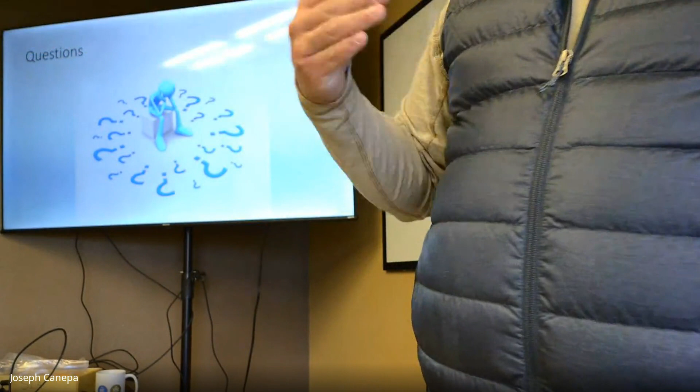You, as the person in there, have got to be answering the phone manually, and you've got to be changing the stations or queuing up that song on the radio. Well, in the newer vehicles, a lot of that's taken off your plate. You can even hit the adaptive cruise control now, and the thing just keeps the spacing behind another vehicle on the interstate. But it doesn't necessarily have some of the same flying performance.

Good question. Anything else? So with your nomination process, did you get selected for that? What kind of questions did they ask? That was like 26, 28 years ago, so I'm not going to know the specific questions, but I'll tell you what kind of questions we ask.

They're really not about aviation. We want to know what kind of person you are, what kind of work ethic you have, what kind of attitude you have. Those are the two most important things: work ethic and attitude. So we're going to ask any kind of question related to that.

What kind of jobs have you had in the past? What would your employer say about you? What would your friends say about you? They're not going to follow up, but we want to know what other people think of you.

Give me an example of a time when—maybe a time you were in a bad situation where you knew one of your friends did something wrong. How'd you handle it? Did you talk to your friend? Did you go tell on them? Those are the kind of things that show level of maturity, work ethic, and attitude we talked about. So those are all the things.

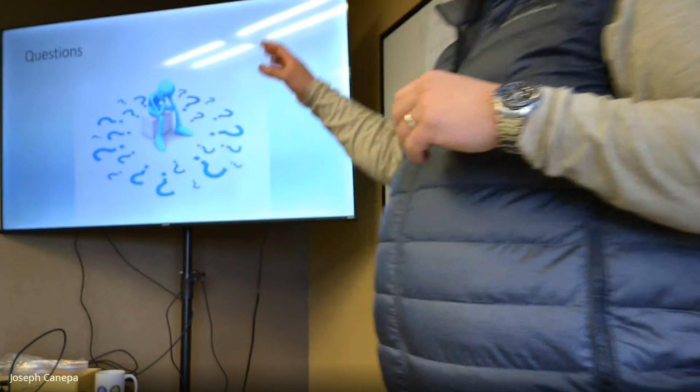So 7 to 8 hour flights. We'll take off out of Madison, we'll meet up with tankers somewhere over Lake Michigan. Usually a KC-135, cells of 2 tankers will take 12 airplanes—we have about 18 to 20 jets in the package, but we'll take 12 in that group, with 2 tankers, 6 on each tanker. We'll refuel probably a couple times until we get to the coast.

And then we'll start to go up over Canada and kind of Greenland, Iceland. Those are obviously, for reasons, we want to not be completely over the middle of the water, but we want to be at a distance where we can divert if we need to, to a place. But then there'll usually be another tanker that comes out and grabs us and they'll drag us along.

So people ask, well, how many times do you got to refuel? So we'll just sit there on the tanker—tanker will be flying and we'll come take fuel. We always have to try to keep as much fuel as we need for the closest divert. So we may have just come off, popped off, grabbed gas, and then another 10 minutes later we've got to come back in and top off.

Because we're in that spot over the North Atlantic where you've got a good distance, so we've got to go to St. John's or Reykjavik or somewhere like that in Iceland. So for whatever reason, if you can't take gas on the tanker, I've got to have as much gas on there right now to be able to make it there.

So you actually fly with the tankers? Yeah, absolutely. Really? Yeah, we could go faster, but we would burn a lot more gas. So it's just like your car, right? If your mom and dad drove everywhere at 90 miles an hour, the engine's running higher RPM and it's got a lot of induced drag on the airplane, or parasitic drag from the mirrors and everything else, and it's got to work harder. So the engine is not as efficient.

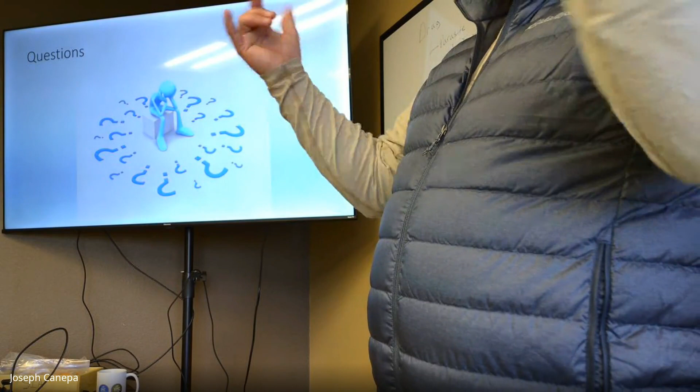Put it literally in afterburner. But when you're in afterburner, you get twice the amount of thrust from full throttle, what we call military power, versus full afterburner. You get twice the amount of thrust, but it costs you 4 times the amount of gas. That's dumping raw fuel into spray bars in the exhaust, basically a controlled explosion, versus what you guys will learn later, a little bit of combustion inside a turbine, which runs to the fan, to the compressor, and the whole thing through a jet engine, which is really the most efficient way.

Which is why commercial aviation doesn't have afterburners, because it doesn't make any sense, right? It's not fuel efficient. Everything's about money. We're trying to make money by getting somebody somewhere because it's a business. So everything's about fuel savings, which is completely different than when I was in the military, where everything was about performance. Any other questions?

Just one last question - can I get that picture of you in the F-16? Yeah, which one? The side profile? F-16, yeah, side profile. Yeah, yeah, you bet. Great, I was hoping we might put a little article on the SIA website. Sure, absolutely.

Okay, you got a question? Did you fly the Dragonfly at all? Oh no, I hadn't - the Dragonfly, that's the little one, I forget the numerical designation of it, but the Air Force Academy uses it for basically, you see, you wouldn't need any of this, right?

If you got hired to go to the Air Force Academy, the Air Force is always going to take you from step one. I went to pilot training with people that had already been commercial pilots, flying for regional airlines, that kind of thing, and they got hired to go into Air Force pilot training, and they don't care what kind of experience you have. They take you from step one, with baby steps, we call it, you know what I mean?

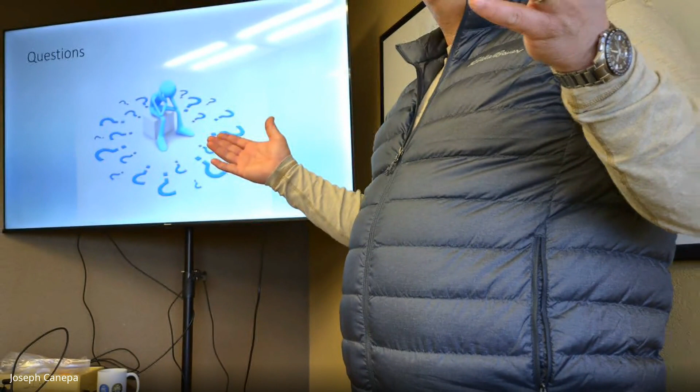And then public administration was a big thing for being an officer, because the Air Force and the military in general will tell you that you're an officer first and pilot second. That's really the way it needs to be. I mean, you're going to spend, on average, I think, a good number of weeks flying in the squadron - I'm going to fly 3 times, but the entire rest of the time I'm at work doing other things, being an officer in charge of things, programs, people, those kind of things.

So that's a big difference from what commercial aviation is like. Commercial aviation now is like, I'm going to go to work on Monday, and the first time I'm going to meet the person I'm flying with is in the cockpit a half hour before takeoff. And how do we operate like that? Because we all operate under the same standard operating procedures - we're all trained to the exact same verbiage, those kind of things.

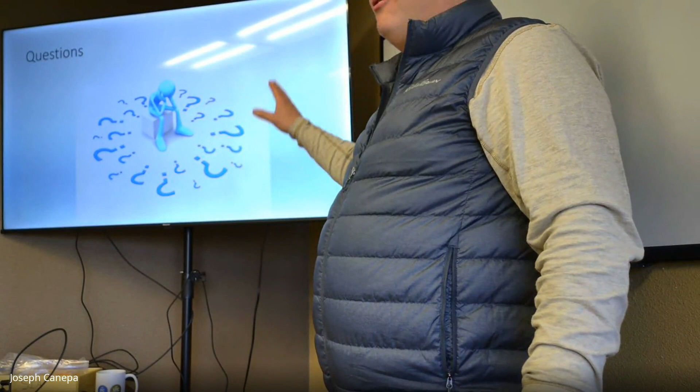Okay, we all fly off the same sheet of music, the same standards. I'm gonna fly with that person for 1 to 5 days, shake hands with them, and then just leave. That's it, no paperwork, nothing. All the things I used to have to do extracurricular in the military, somebody else does that for me now, including my flight planning. If we have a problem with the dispatch, like hey, this route or something, we don't try to adjust it ourselves. We call the dispatcher who's running all the numbers on a computer. They change it, plug it back, send it back to us on our computer, and then we use that. It's mainly for efficiency, but it's a lot more relaxing way of life for me now.

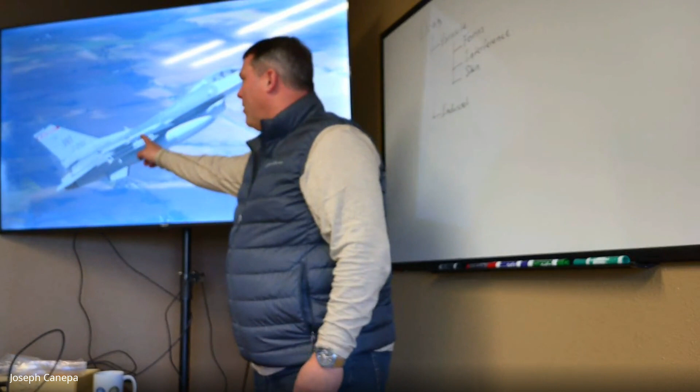So, have you used any live missiles? Actual training? Yeah, I've shot. So this is what they call an AIM-120 or an AMRAAM, and this is AIM-9X. It's an image seeker, I'll call it. This is a radar missile.

So I think 2016, the Air Force has a program called WSEP, Weapon System Evaluation Program, constantly studying. The Navy does too, we call it cradle to grave weapons probability of success. They want to find out tactically what the probability is, in war game scenarios, of that thing hitting the target and making it go away. That may be a failure in the production of the aircraft or the missile, a failure in the aircraft, a pilot mistake, a maintenance mistake, you name it. It may be some kind of countermeasure from the enemy, that kind of thing. So that's what they do there.

They take some of the older missiles in the inventory that have had their time, put telemetry kits in instead of the warhead, and they'll do all this stuff and learn from it. If that thing doesn't meet the parameters of what they call a kill, then it's considered a failure. They know the probability of something happening, like 90% of the time this thing's gonna get there with the proper weapons effects. If it doesn't, they evaluate where that program failed. Was the missile left in a container on the ramp in the sun and it fried the electronics? Was that a maintenance issue? Those kind of things. I shot one of these at WSEP 2016. That missile right there is $1.5 million.